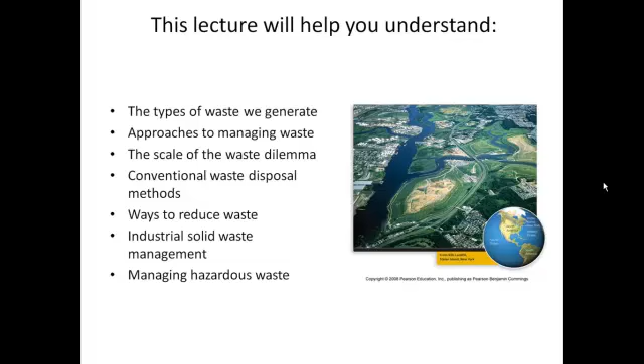Our case study is the Freshkills landfill, which was the largest landfill in the world. It permanently closed in 2001. The last amount of waste was actually rubble from the World Trade Center attacks on September 11th. It has since been closed, capped, and will be turned into some form of recreation center by the city of New York. Some important terms to keep in mind.

Waste is pretty much anything we don't want anymore. Anything that is produced by human activity that we don't want anymore and need to get rid of. Municipal solid waste specifically refers to non-liquid waste that comes from homes and small businesses. So this is the trash you drag out to the curb every week. Industrial solid waste is waste from any type of production of consumer goods or any type of other commercial business, whether it's mining, agriculture, or petroleum extraction and refining.

Hazardous waste is waste that is either solid or liquid that has one or more of these four properties. It could be toxic, reactive, flammable, or corrosive. And wastewater is water from households or businesses, as well as polluted runoff. We're not going to focus on wastewater in this unit. We're going to focus on municipal solid waste, or MSW, industrial waste, and hazardous waste.

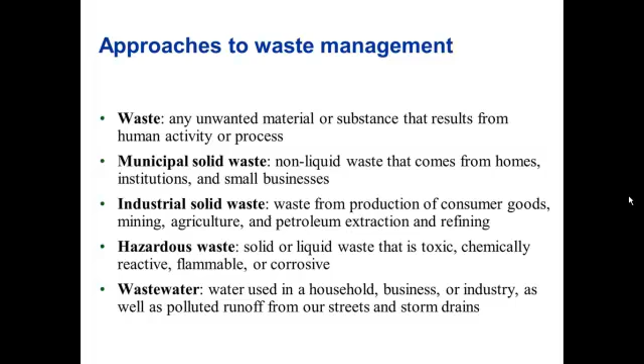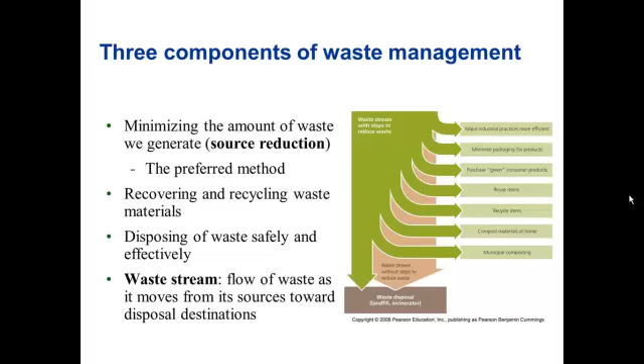Waste management consists of basically three components: recycling and recovering, minimizing the generation of waste or source reduction, and finally disposal of the waste. Municipal solid waste, also known as trash or garbage, is a big problem in every country, in particular the US. We generate a lot of trash, and many people have criticized the US lifestyle, calling it a throwaway society because of the use of excessive packaging and other disposable or non-durable goods. It generates large amounts of waste stream.

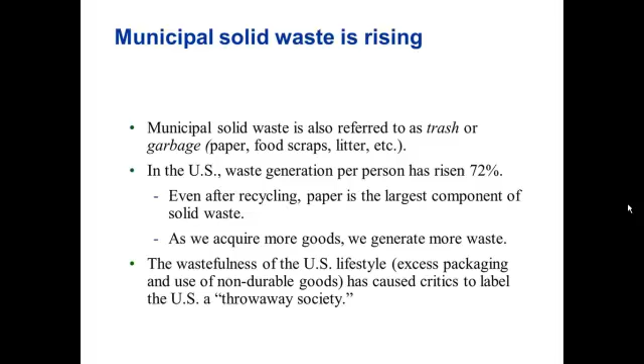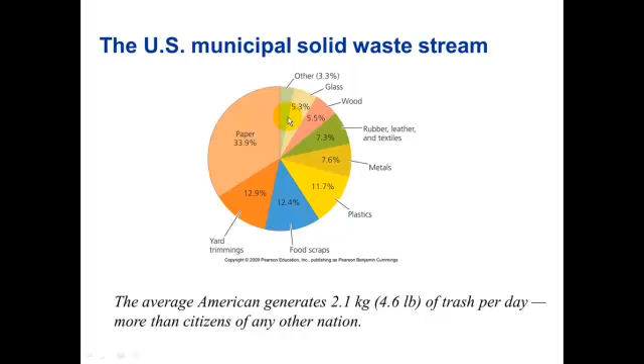In the US, the average American generates almost 5 pounds of trash each day, more than any other nation. And you can see from this pie chart, the type of material generated in the waste consists of a number of different types of material, paper being the largest single component. Waste generation is rising in all nations, and disposing of it is a problem both in developed nations and in developing nations. In many developing nations, poor people often scavenge the waste dumps in their communities to get things that they could sell or use in their home.

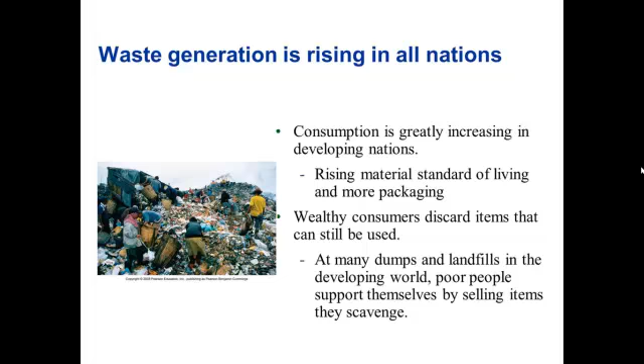Tragically, in one dump in the Philippines, a pile of waste collapsed and actually suffocated several people, resulting ultimately in the government closing that dump from anybody scavenging in it anymore because of the tragedy. Recycling, composting, reduction, and reuse are rising in most developed nations, thereby reducing the pressure on landfills. And landfills are the most common way that waste is disposed of.

What is often referred to as a sanitary landfill is a landfill where waste is piled into big mounds. These are regulated by state and local governments, as well as the federal government under what's known as the Resource Conservation and Recovery Act, or RCRA, which requires that all such landfills be permitted and regulated. While the waste is in the landfill, it begins to decompose, and oftentimes as water seeps through, it will pick up various contaminants from the waste, resulting in contaminated water, often referred to as leachate. It needs to be collected in order to prevent it from contaminating the groundwater.

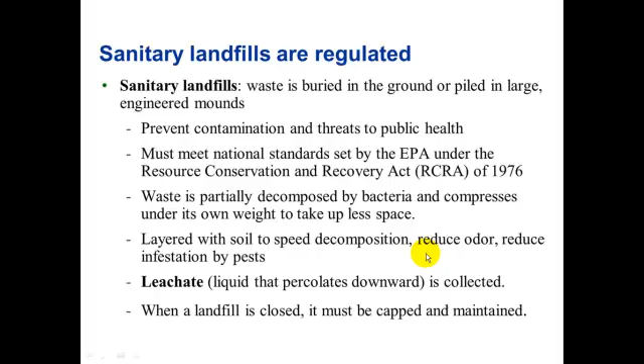Each day's waste is piled up and then covered with soil to prevent the attraction of pests like rodents or seagulls from getting into the trash. So at the end of the day, they cover it with soil to keep, again, pests from getting into it and allow the trash to eventually decompose.

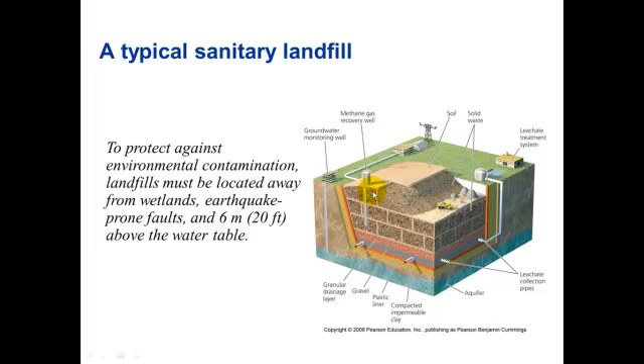Finding a suitable location is often very tough. They call this the NIMBY syndrome, not in my backyard. People don't want the trash in their backyard. They want it taken far, far away from their community where they never have to see it again. So nobody wants to find out a landfill is going near their community. So often when a new landfill is proposed, it receives stiff resistance from local residents.

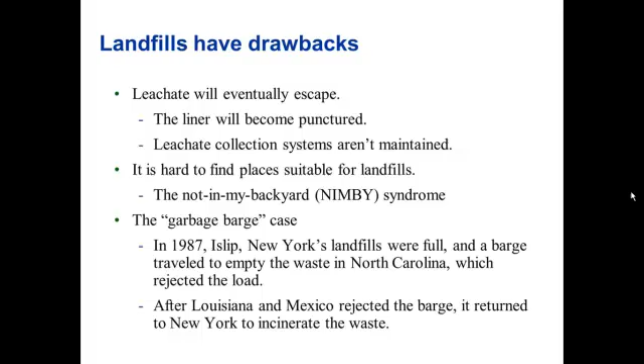Another method of dealing with waste is incinerating it, which is burning the trash at very high temperature. This will greatly reduce both the volume and mass of the waste generated. However, it doesn't completely eliminate it. You still have about 10% of the original mass left over in the form of ash that will have to be sent to a landfill. So while incinerators don't eliminate the need for landfills, they can greatly extend the lifespan of landfills and reduce the need for more landfills simply by reducing the amount of space needed.

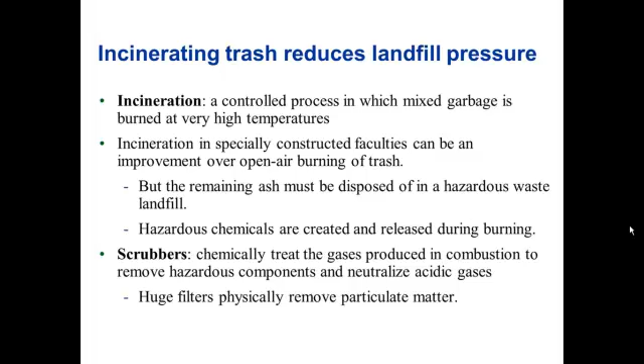The ash is one waste product. Another waste product are often air pollutants that must be captured by scrubbers and other air pollution technologies to remove hazardous components from the emissions. And here we have a schematic of a typical solid waste incinerator. First, the truck backs up on what's known as the tipping floor. It's called that because, well, they tip the truck open and dump the waste into the storage pit.

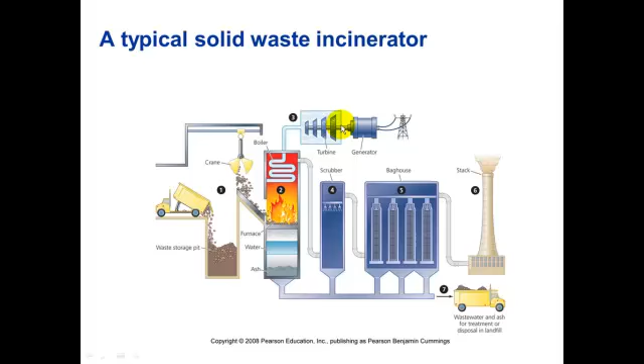It is then picked up by the crane and through a series of conveyor belts, it's then delivered to the furnace where it is burned, and then the emissions are captured by the scrubber in the bag house, and the ash is collected at the bottom. So we have two types of ash, the fly ash captured from the emissions and the bottom ash. These both end up in a landfill. Now, this solid waste incinerator is also being used to generate electricity by boiling water and running a turbo generator. And for this reason, many incinerators are often referred to as waste-to-energy facilities.

But they are expensive to operate, and it may take years for an incinerator to become profitable. As many people here in South Central Pennsylvania know, one of the reasons why the city of Harrisburg is experiencing such severe economic problems is because of the large amounts of debt that the city's incinerator has built up. They have spent many decades with problems upgrading the emissions control systems for the incinerator, and high operating costs and very little revenue coming in has caused the city to rack up huge amounts of debt.

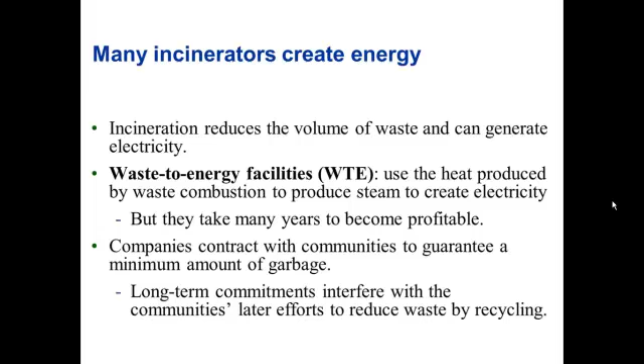So it can take a while. It can take a long time, or maybe even never, for a waste-to-energy facility to actually make back the initial investment. As I mentioned also, the gases that are produced by the decomposition of waste inside a landfill can also be used as a source of energy. It's mostly methane, so that can then be used as a source of energy, just like natural gas.

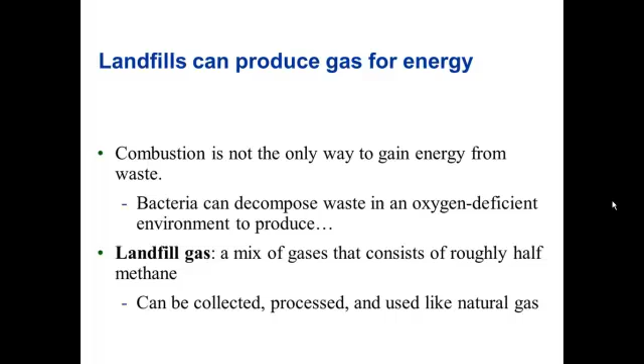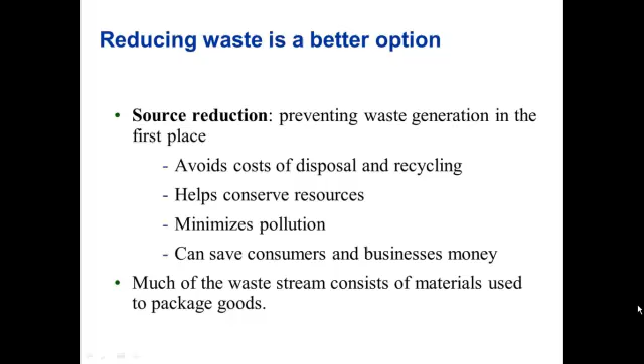A better option than disposal is source reduction, reducing or preventing the generation of waste in the first place. This eliminates all the cost of disposal and recycling and minimizes pollution and other problems associated with the generation of the waste to begin with.

You can reduce waste at the manufacturer level. One way is to choose minimally packaged goods, buying things in bulk. You can see over the years, many products have become packaged in smaller and smaller containers. Prime example, things like software. The boxes that are used to ship software are becoming smaller, less space is needed for things like instruction manuals. Those are being reduced in size, and most of the instructions are now often on the CD-ROM itself in the form of a PDF or other help document.

Other things like CDs. If you bought music CDs in the 1980s, they were sold in cardboard boxes that were almost 1 foot long. And even though the jewel case itself is very small, the reason why the boxes were so long was purely an anti-theft measure, because the larger box was harder to sneak out under your coat or in your purse or whatever.

So CD stores, music stores switched to more electronic tags to reduce theft as opposed to these larger packages. So now the cases are simply shrink wrapped in plastic wrap instead of put in these larger boxes. Other products like deodorant and other consumer goods have seen significant reduction in their packaging. So those are some examples.

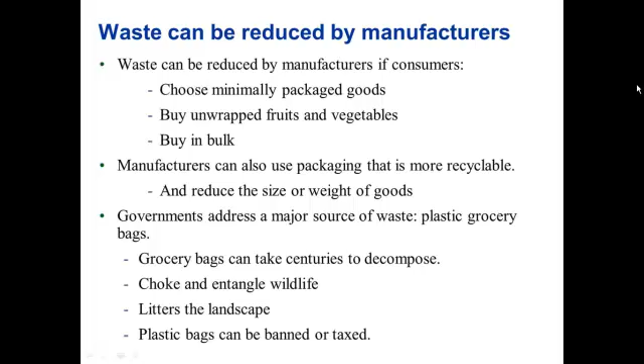Reusing is another way to reduce waste. Buy stuff in bulk, bring your own cup to coffee shops. Many coffee shops actually will give you a discount if you do that. Double-sided photocopies. Taking your old inkjet cartridges to a store that will recycle them. Composting kitchen and yard wastes are all ways that you can reuse stuff.

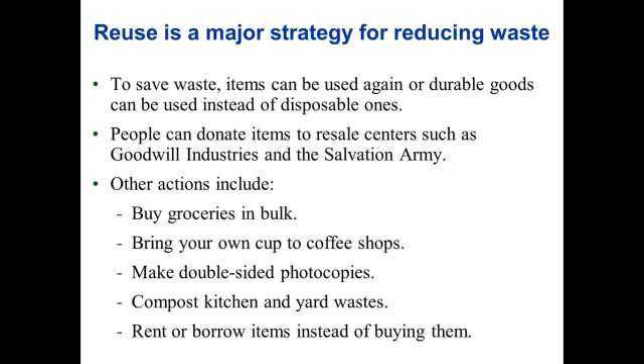Composting is a way of recovering organic waste, including kitchen and yard waste, using bacteria or other critters in the soil to break it down and convert it to a compost that can be used as a fertilizer in your garden or other lawn treatment. These, again, will reduce waste and have a benefit to the soil as well.

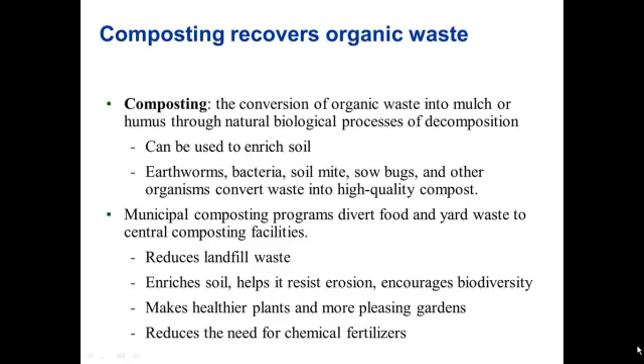Then there's recycling, which is taking used goods and reprocessing them into new items. Step one is bringing them to what are known as material recovery facilities, or MRFs, where the materials are sorted, cleaned, shredded, and then reprocessed. Now, decades ago, MRFs used to depend on people actually bringing their recyclable materials to them. And they had very low participation in this process because it was a bother. Nobody wanted to save up their newspapers for weeks and then truck them all out on a Saturday morning to the MRF. So instead, starting in the 1980s, communities began collecting recyclables for free.

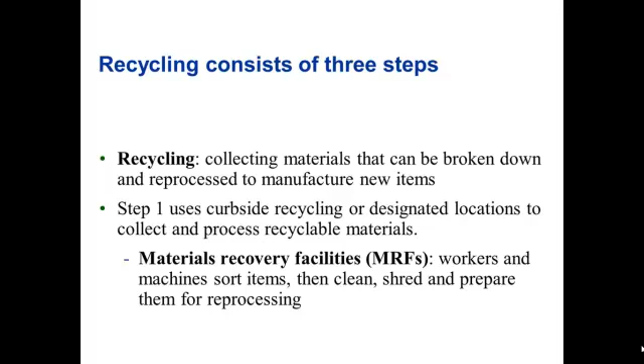And today, in most municipalities in Pennsylvania, you're often given a recycling bin or barrel from your local government, where you can put plastic and cans and other recyclable materials to be collected. And by having curbside pickup of recyclables, you get a much larger participation among residents because you make it easier for them. Step two, process them into new products.

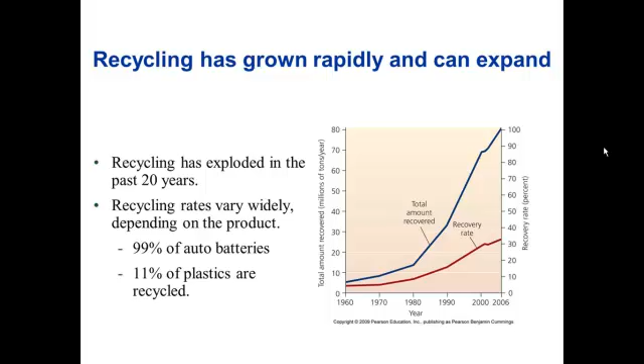And step three then is bring them to market where people will buy them. And that's one of the keys. If there's no market for recycled goods, then no matter how well designed a recycling program is, it ultimately won't work. But recycling has grown tremendously, especially since the 1980s, to the point where these days a number of things are recycled in large amounts, 99% of auto batteries, for example. Other things are not recycled in the same amounts.

Another way to address waste is taking the pay-as-you-throw approach. One local municipality that I'm aware of, the Borough of Carlisle, requires residents to put trash in special bags that you have to buy from the borough, and then they'll pick up the recyclables in a separate container for free, but they charge you based on how much waste you generate. The more waste you generate, the more bags you have to buy from the municipality. So everyone pays for the trash amount they generate rather than a flat monthly or quarterly rate.

So the less you waste, the less you pay. It's to encourage people to generate less waste that way.

Plastic recycling has a number of things that have to be dealt with. One is the fact that plastic is not one single material. It's actually a group of different materials, and each plastic is given a particular number. For example, high-density polyethylene, or HDPE, is assigned the number 2. Any recyclable plastic container will have one of these numbers stamped in it somewhere, and this is to identify it at the MRF so that they can sort that.

You cannot mix two types of plastic together when you recycle them. Do that, the plastic won't hold together, they don't mix, and they won't form a viable product. So you have to separate the PET from the HDPE, and so on, as you recycle, because you don't want to mix these together. Tires are another thing that are often recycled.

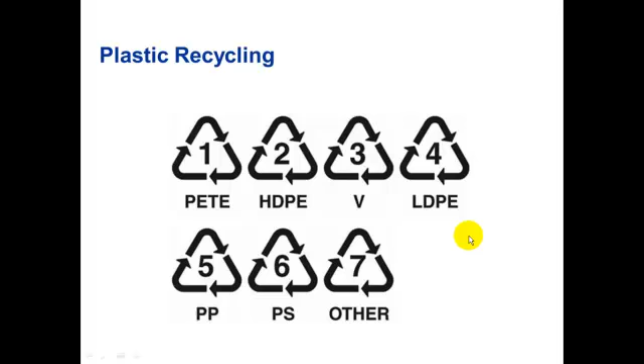Funny thing about tires, you can't landfill. Tires are so buoyant that rainwater eventually lifts them out of the ground. They will literally pop out of the soil if you try to bury them. So they have to be shredded or incinerated or recycled into other materials. Tires are often recycled into playground material or other types of ground cover used in parks.

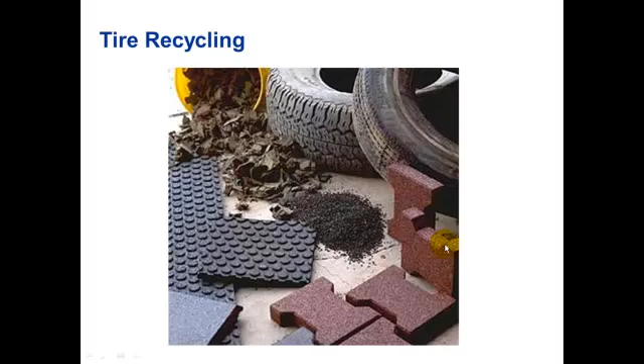Paper is another widely recycled material. There are two types of paper recycling. There is what is known as pre-consumer paper, paper that was recycled from the leavings during the manufacturing process. And this never left the paper mill, so it just gets gathered up at the one end of the manufacturing process and then taken back and pulped up again to be used in the next batch of paper.

And then there's post-consumer paper. This is paper that, for example, was used to print newspapers or office paper, and then after it was used, it was then sent to a recycling center and reprocessed into new paper. Now, if you look at anything that advertises itself as recycled paper, you'll often see in the fine print how much is pre and how much is post-consumer paper content.

And this is very important because having a high pre-consumer content is not really doing much to reduce the burden on landfill. If you want to reduce the amount of waste that actually ends up in landfills, you want to buy products that are made of as high a post-consumer paper content as you can find.

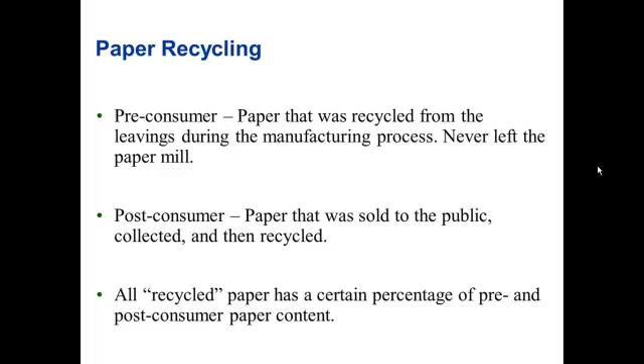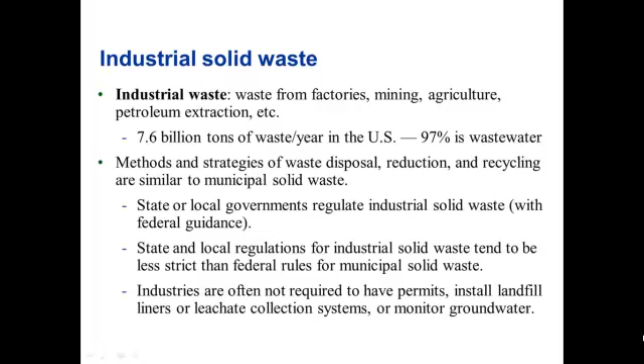Now, industrial waste is waste from factories, mining, agriculture, and other industrial processes. Many of the strategies for disposing, recycling, and reducing are similar to municipal waste, but local businesses often have to contend with some unique forms of waste that aren't generated in people's homes. One way is to take an approach where you treat the industrial process as an ecological process. In ecology, what is generated as a waste in one process becomes an important resource by another organism.

These all give us some commercial products like bread, mushrooms, pork, that we can use as other things we could sell. So instead of just spending money to dispose of the waste, we ultimately create more consumer goods and expand our business. So you become less wasteful as a business and you generate more income for yourself instead of viewing waste as a money loser.

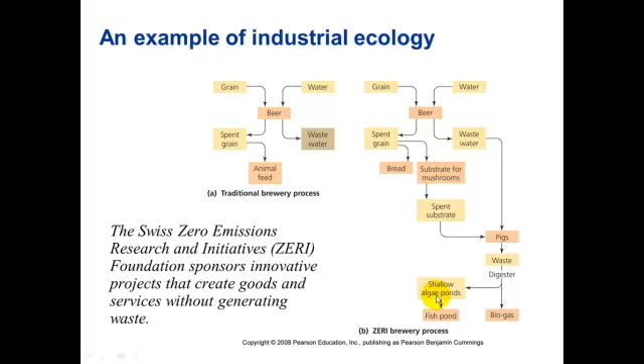The substance could be reactive, in which case they're chemically unstable. They might explode or produce hazardous fumes under the right conditions. And finally, the material could be toxic, which means they are harmful to human health when people come in contact with them, either inhaling, ingesting, or on the skin.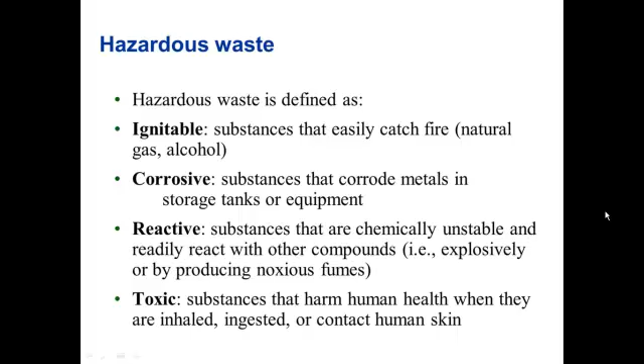So it could be any of these four things, or it could be all four of them. Hazardous waste are generated through a variety of industrial processes, including mining and agriculture and manufacturing, and they can also be generated by homes. Household hazardous waste are often of specific concern because each individual home may generate very small quantities, but added up in toto, these can be a significant source of hazardous waste that need to be dealt with. It can include paints and batteries and cleaning agents and pesticides that are laying around the home that could be materials that are toxic or otherwise harmful to human health or the environment.

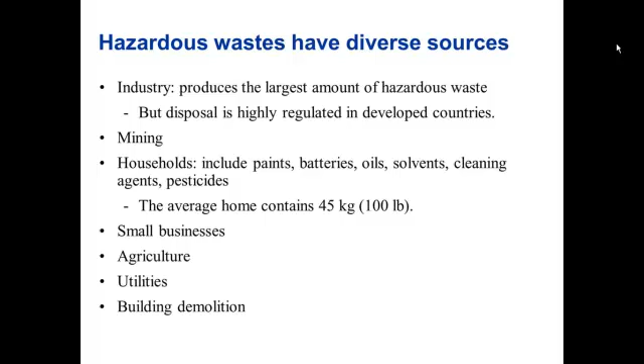There are two main categories of hazardous wastes. First one are synthetic organic compounds, and these include pesticides and paints and solvents and all kinds of other pollutants. And many of these are very persistent. They don't readily break down in the environment. Many of them are toxic, and they have particular hazards, including mutagens, carcinogens, teratogens, and endocrine disruptors.

The second category are the heavy metals, like lead, chromium, mercury, arsenic, etc. These are widely used in electronics as well as pigments and dyes and metal plating. And these will bioaccumulate in the tissues of living organisms, and they are all toxic and can damage various organs in the body. In particular, organs like the brain and central nervous system and the liver are vulnerable.

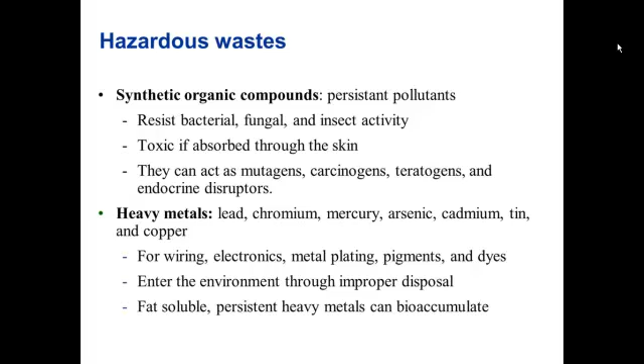E-waste, or electronic waste, is a rising problem. Many electronic devices, including our cell phones and our iPads and our computers and TV screens, contain levels of heavy metals in them that should have them classified as hazardous waste. And this is a particular concern because many of these things, they go obsolete. Apple comes out with a new iPhone just about every year. And of course, everyone's got to buy the new iPhone and get the latest and greatest. So they get obsolete. And even though they may still be working, people still throw them away and can generate hazardous problems in the landfills.

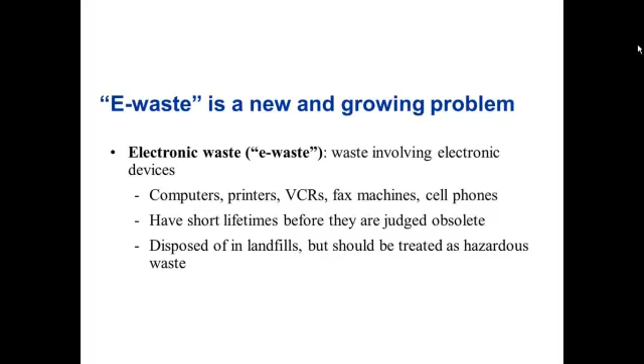Under the RCRA Act, states are required to manage hazardous waste, and large generators of hazardous waste are required to track those waste from cradle to grave. In other words, from the generation of the material to where it is ultimately disposed of in a landfill. And these facilities also are required to have permits under RCRA.

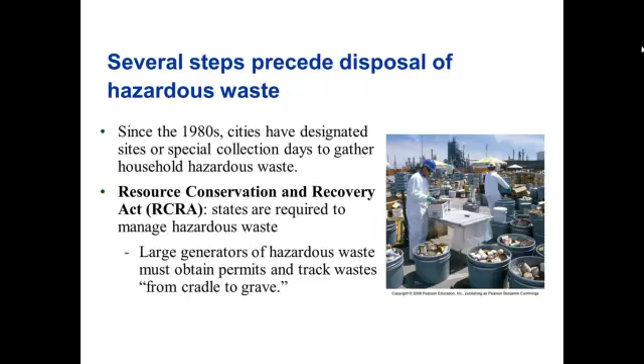One of the things that have to be addressed in regards to hazardous waste are activities that were illegal or harmful. Many companies dumped their waste in illegal dumps or kind of just made it disappear mysteriously, shoving it off to one corner of the world where nobody was looking at the time. And this resulted in many contaminated sites that had to be dealt with. And under federal laws that were passed in the 1970s to curb these practices, companies today can face some pretty stiff fines if they're caught disposing of waste in any manner that is harmful or illegal.

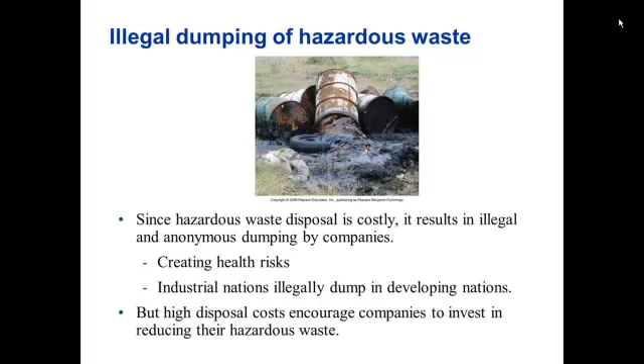One type of problem that was generated in past practices were what are known as orphan sites. This is where a company accumulates large amounts of waste. Maybe they were hired to dispose of the waste by other companies, and they stack the drums of waste in some corner, in some open field somewhere where, again, nobody's looking. And then once the area is filled up, the company declares bankruptcy, dissolves itself, disappears, and then leaves all these drums to rust in the field. Of course, this results in often generating pollutants in the soil and the groundwater as they leak out of the drums and seep into the ground.

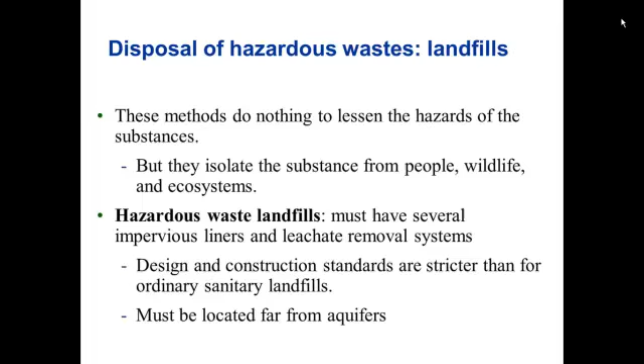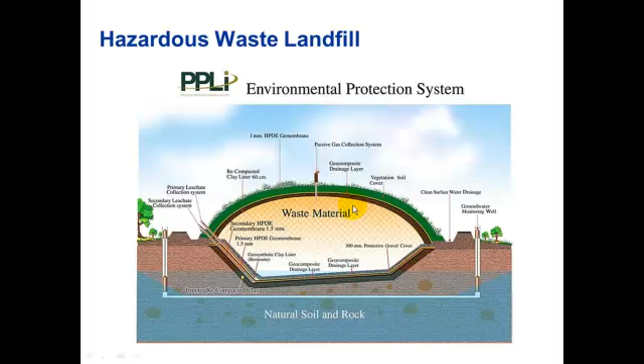Another disposal method are what are known as surface impoundments. And these are actually temporary disposal solutions where the water containing hazardous waste is put into a shallow depression to allow the water to evaporate, leaving behind the hazardous residue that then can be sent somewhere else.

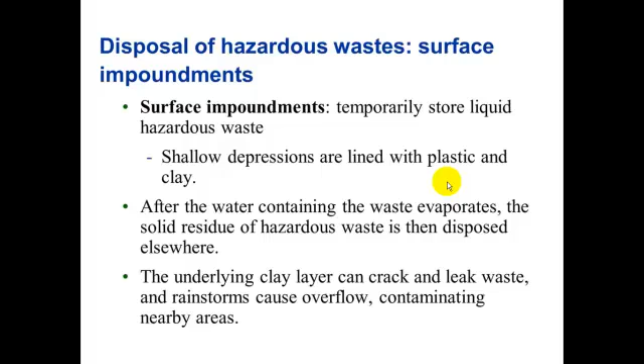And of course, one of the problems with these is that the linings of these impoundments can crack and leak, and rainstorms can cause them to overflow, causing them to contaminate the area. And so an improperly managed surface impoundment can have numerous problems associated with it if it is not properly maintained.

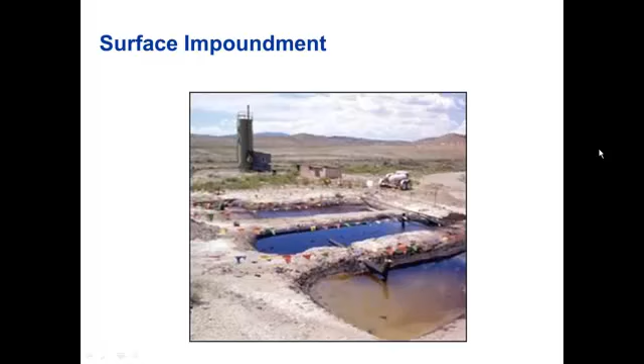Another method is deep well injection, where you drill a well deep underground and then inject the hazardous waste into a layer of porous rock that is hopefully separated by an impervious layer of soil from the aquifers above it. And the idea, again, is to completely isolate the waste from the groundwater so as not to contaminate any drinking water supplies. However, these wells can corrode, they can crack, they can leak, so oftentimes these wastes can migrate up into the aquifer and contaminate well water.

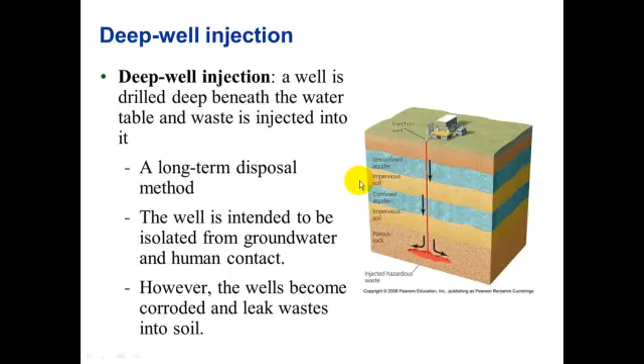Now, as you can see, especially in cases of orphan sites where the waste was abandoned, or what's often known as midnight dumping, where waste was just dropped off in an abandoned field or an old warehouse and just kind of mysteriously appeared overnight with no paper trail, no information as to where it came from. Basically, the company just said, okay, we'll just throw it here and pretend it's gone now, and that's it. So we had a lot of contaminated sites in this country.

And to deal with it, first we passed laws like RCRA, which mandated new standards for disposal methods of these hazardous wastes. And then in 1980, we passed the Comprehensive Environmental Response, Compensation, and Liability Act, or CERCLA, more commonly known as the Superfund Act. And this act was intended not to regulate new disposal methods, but to fix problems from past practice. In other words, to identify polluted sites and then provide a funding mechanism to clean them up.

Often these sites are called brownfields. These are lands where the soil might be contaminated by hazardous materials, which may make their reuse or development problematic. So this was spurred by some pretty high-profile cases like Love Canal in New York, where families had to be evacuated because of a contaminated site that was actually leaking into their homes.

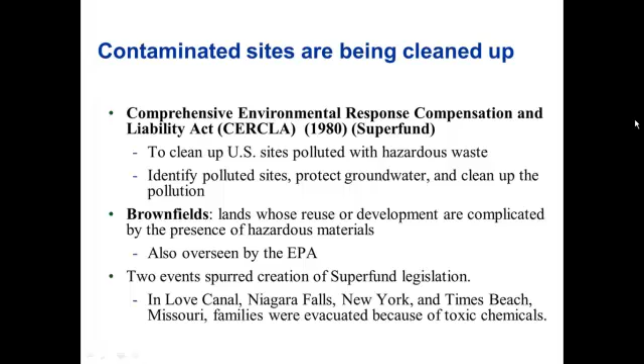And the Superfund process works basically like this. When a site is identified that is contaminated and needs cleaning up, the EPA steps in and starts doing an evaluation. And then they do whatever methods are necessary and most expedient to contain the contamination. And then they put it on what's known as the National Priorities List. And once on the National Priorities List, or NPL, contractors are hired to begin the cleanup process. And the NPL ranks them according to what the risk is to local residents, and then they're cleaned up on a site-by-site basis as funds are available.

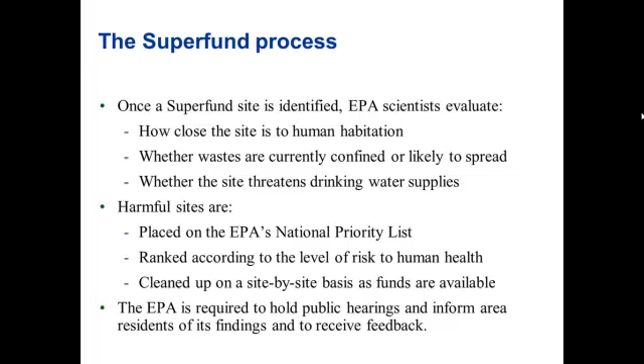Once the site is cleaned up, there are public hearings. Residents are informed of what the problem is and what they did to clean it up, and the public is given a chance to tell the EPA what a horrible job they did and why everything is still messed up. Eventually, then, the site is declared cleaned up and removed from the NPL.

CERCLA is based on what they call the polluter pays principle. If a responsible party can be identified, and that's a pretty broad category, it could be the former owner of a site, it could be the company whose waste was disposed of in the site, and it could be anybody else who was involved in the chain of custody of this waste from cradle to grave, again, from where it was generated to where it ultimately ended up. Anybody in that chain could be considered a responsible party.

And if a responsible party is identified, EPA takes them to court and wrangles a settlement out of them to pay for the cleanup. And this is why CERCLA is often called by many in the industry, in a rather tongue-in-cheek manner, the Welfare for Lawyers Act.

Now, if a responsible party cannot be identified, then the money comes out of a special fund. And originally the fund was paid for by a federal tax on the chemical industry, but that tax was not renewed in recent years. So now to pay for the cleanup, it comes directly out of taxpayer funds from the general federal funds. The average cleanup costs $25 million and takes 12 to 15 years. And that concludes our discussion on waste management.